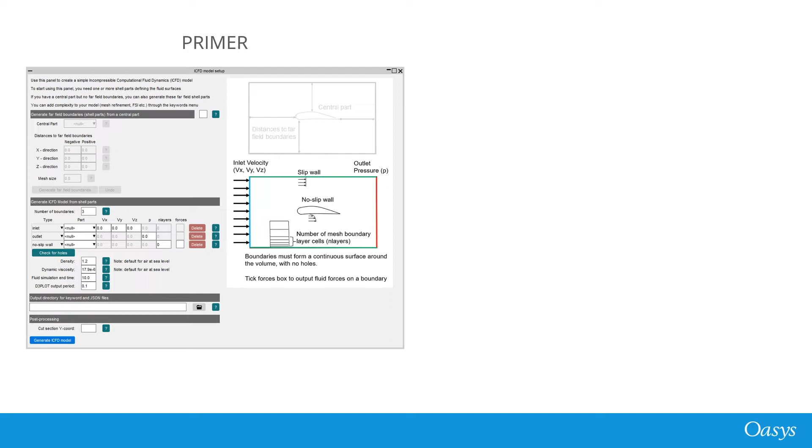an ICFD setup tool. From PRIMER 19.0, the tool lets you specify an output directory for the keyword file. A JSON file is now also written, containing inputs required for post-processing in REPORTER. REPORTER now comes with an ICFD assessment library template, which can be found in the new ICFD tab.

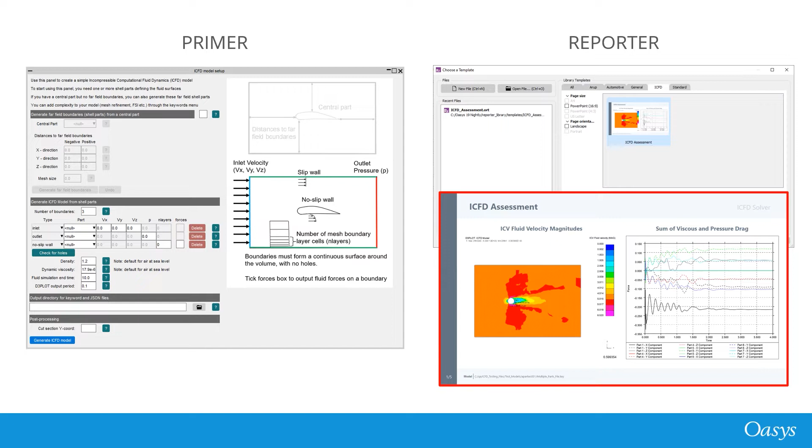Designed to be used with the setup tool in PRIMER, the template includes an animated contour plot of fluid velocity magnitudes on a cut section through the model, and a graph of viscous and pressure drag forces. Let me show you how it works.

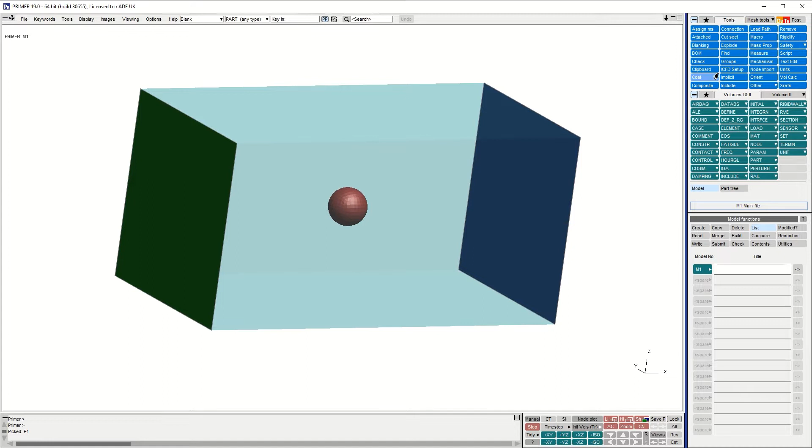So we're in PRIMER and I have a simple test model here. It's just a cuboid volume. If I make the central part a bit more transparent, we can see that inside we have a sphere as our test piece. So the first thing I'm going to do is select the ICFD setup tool from the tools menu. And this has a whole load of steps that help you set up a simple ICFD model to get to grips with the solver in LS-DYNA.

The first thing I'm going to do here is increase the number of boundaries from 3 to 4, and that gives us a new row in the table here. And we're going to need to define which parts form our inlet and outlet, as well as any of the other boundaries in the fluid volume.

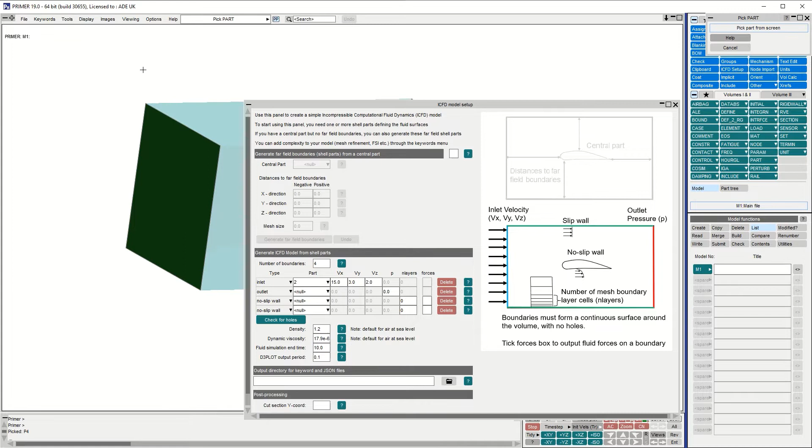So to select the inlet, I'll pick the part on the left-hand end here and set the fluid velocities. And then for the outlet, I want to pick the part on the other end of the volume, and this here will give it a pressure. And then for the test piece itself, I want to select part number 1, and for the slip wall along the sides, that's part number 4.

Now for the test piece itself, let's get the force output. We'll set 6 boundary layers for that and 2 boundary layers for the slip wall. We can check for holes to make sure that our geometry is complete, so that's all good. And I'll just leave the default settings for density and viscosity and so on.

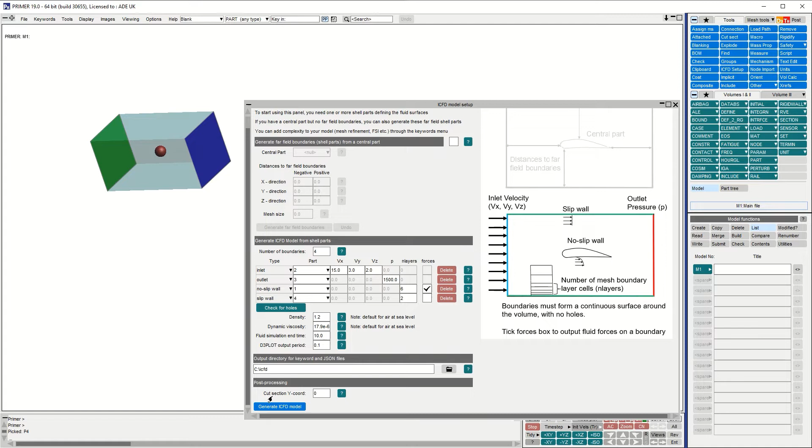So the new part for PRIMER 19 is being able to select an output directory for the keyword and JSON files. So if I just set a directory here, then it's pretty much ready to go. The final thing is that it's already identified that the center of our model is at y equals 0, and that will be used to take a cut section during the post-processing in REPORTER that you'll see in just a moment. So now that everything's ready, I can click Generate to generate the ICFD model.

This is showing all of the ICFD keywords that have been created. And if we look in the output directory, you can see we've got the keyword file that's been produced and also the JSON file, which contains that setup data that's used by the REPORTER template.

So once we've run the model in LS-DYNA, we should end up with a set of results files that look something like this. I've also created a REPORTER output folder, which we can use to put any of the images and other outputs from the new ICFD REPORTER template. So we can try that now. So in REPORTER, we can go to the new ICFD tab and select the ICFD assessment template.

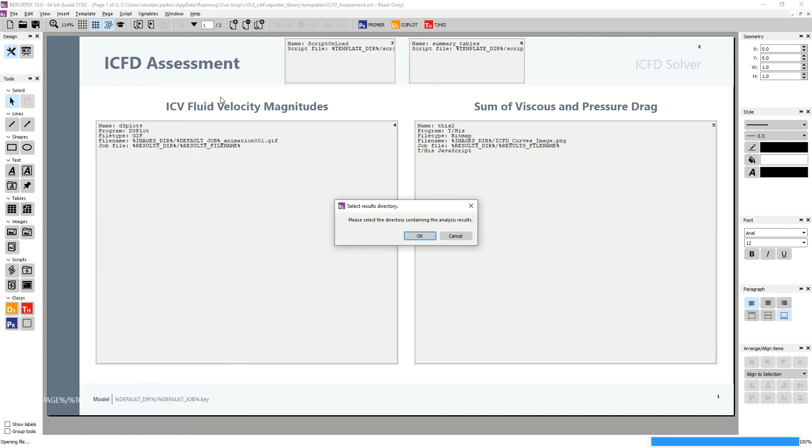When the template opens, it prompts you to select the LS-DYNA keyword file of the job that you want to process. So we'll select the ICFD model, and then to select the JSON file created by the ICFD setup tool in PRIMER. So we'll select that, and then select the directory containing the analysis results. That's this very directory here. And finally, a directory to write images or curves to. So we'll select the folder that I created earlier.

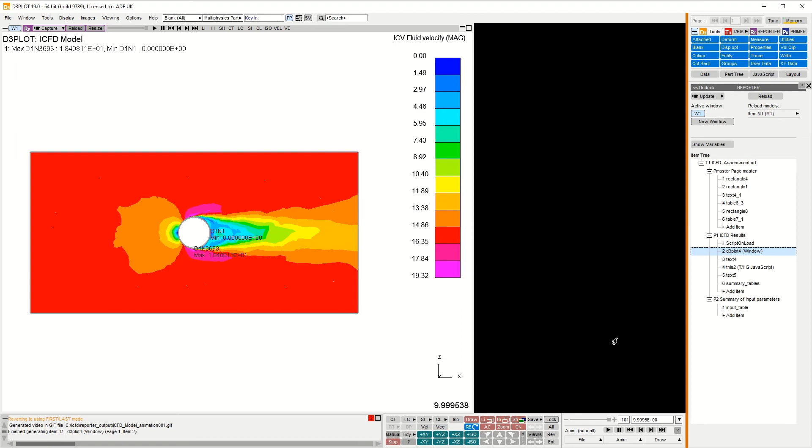Once we've done that, REPORTER will run through, first of all opening up D3PLOT to capture the cut section of fluid velocity magnitudes. And then once that's finished, it will open T/HIS to calculate the drag forces. And that's the template generated.

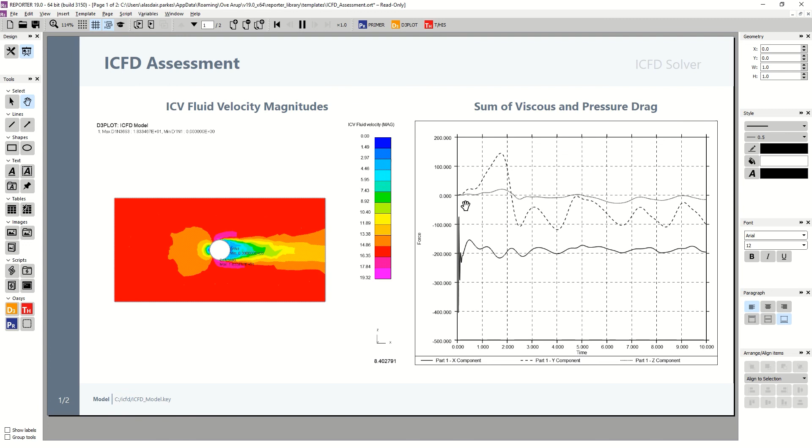So once it's generated in REPORTER, we can play the animation of the fluid velocity magnitudes, and on the right hand side we have the sum of viscous and pressure drags, and they're shown in their x, y, and z components. And finally, as a bonus, on the second page of the template, there's a summary of all of the input parameters that we set in the PRIMER setup tool.

You can save this template out to PowerPoint or PDF, and hopefully it's a useful way of you exploring the ICFD features of LS-DYNA.